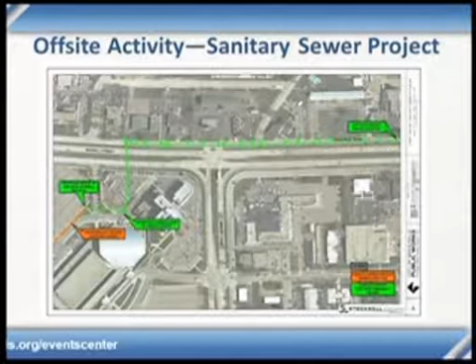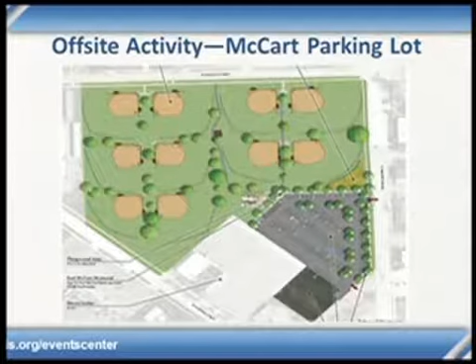Next project is the additional parking being added at the Earl McCart fields. We've had good discussions with the Park and Rec team, specifically Don Kearney, and met with the McCart sisters on site to review the proposed plan and got good feedback from them. Next week the Park Board will see the proposed project. Our anticipated letting schedule is in June, with completion by mid-October, adding just short of 300 additional spaces to the McCart fields.

One of the things we wanted when working with the McCart sisters was to make sure we recognize the McCart family. So one of the features being added right near the existing playground in this park is a sign that will highlight their family's name at a focal point in the park. It's been a good working process.

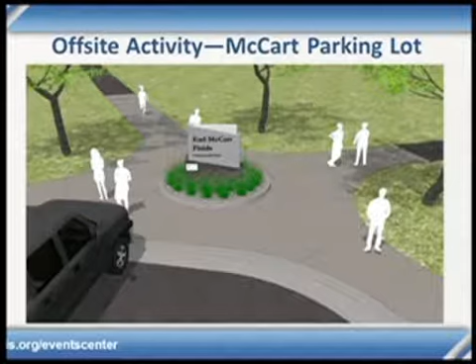Now I'd like to introduce the Mortenson team, led by Dan Mills, Greg Huber, and Jason Miranowski, who will take you through the schedule as well as the 4D visualization of the event center. There's been questions this week about what 4D is — essentially, you take a 3D image view of what a building will look like when it's being constructed, and add the schedule to get that 4D element. This is a key aspect of hiring a team like Mortenson that handles this scale of project, allowing them to lay out construction in the most efficient, cost-effective manner, while coordinating subcontractors safely and effectively. With that, I'd like to bring forward Dan Mills.

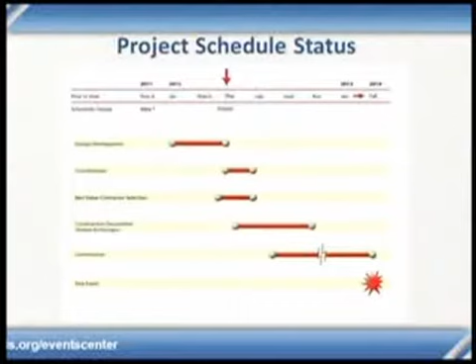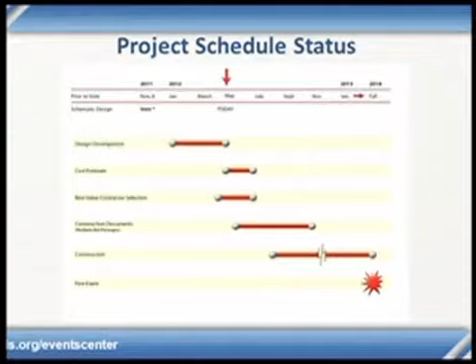We will also, in parallel with getting ready for the start of construction, be starting to issue our bid packages. There'll be 4 additional bid packages outside of the one that's on the streets right now. Bid package 2, the site and foundations, will go out in June. Bid package 3, the structural steel, elevators, some concrete work, and the ice rink, will go out in August. Bid package 4, the enclosure around the building and the roofing, plus the interior framing of the walls, will go out in November.

And then the final package, which wraps up all of the interiors of the building, will go out by the end of the year. So there'll be a phased process for finishing the design and procuring the rest of the work.

As I mentioned, construction will start in July with a planned completion by the fall of 2014. So we can schedule our first event for fall of 2014, and schedule our first event then for late 2014.

So with that schedule overview, I want to introduce, well, you know him already, Greg Huber with Mortenson. Greg has been leading our planning efforts during the design phase. So Greg and I are going to walk through the phasing of the project.

In order to best describe the phasing and the intent of how we build the project, we've developed a 4D model. It's a 3-dimensional image tied to the schedule being the 4th dimension, i.e. the 4D model. We find this tool very beneficial for fleshing out challenges of exactly how we phase the structural work versus the enclosure work versus the interior work. Sometimes we resequence based on this model, and then it becomes a great communication tool to the subcontracting community when they're trying to price the job. So it takes a large, scary project and breaks it down into manageable pieces so that we can get more competitive prices.

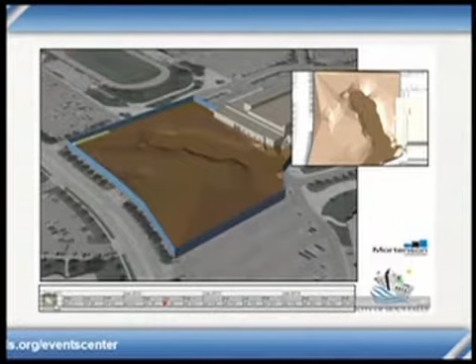So as you look at it now, before we get started with construction, we first have to secure the site. The blue walls, as it appears around the perimeter, will actually be temporary site fence to keep the public safe. It'll also be an opportunity for signage for the city and advertising events and whatever else we might want to do for public information.

The brown area in the middle is actually a subterranean image of the ground below grade and the rock elevations below grade. So with that, I'm going to turn it over to Greg. He can talk a little bit about the subterranean.

Madam Chair, Council, thanks for the opportunity again. We're really excited to be showing this to you guys. This is the result of a lot of work from the design team, and we took that model and, like Mark said, applied time to it so we could visualize construction. The side benefit is that everybody else gets to see our vision right along with us.

What you can see there is the subterranean profile of the rock. Right now what you see on the surface is a parking lot. What actually is under there is a combination of rock that's close to the surface and kind of a valley that runs diagonally through the site. That was determined through the geotechnical exploration conducted by AET about 3 or 4 months ago, where they probed down to see how far the rock was.

That drove all of our foundation systems, and as we go along and show the foundation construction, you'll see the differences. On the bottom line, like Dan said, there's a time ticker, and that's a direct link to our construction schedule. So as we move along here in mid-July, you'll start to see a little bit of color shading and variance.

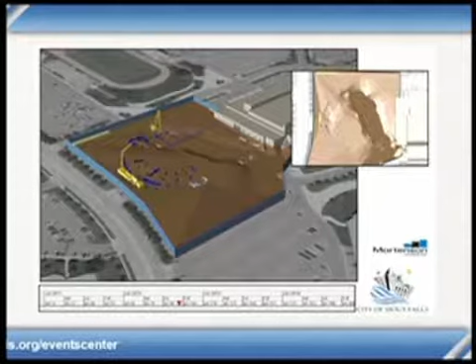The reason we're starting when we're starting is so that we can get the concrete work, the foundation work, done in the summer and fall, and get that completed, so you don't have to heat the concrete or heat the soil when placing it.

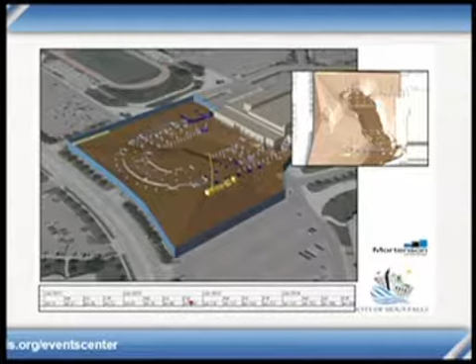Some of the work you've seen, as well as all the right-of-way, was the site stripping - taking off all the asphalt, bringing in clean fill to place all the foundations around. At this point, this is going to be late fall, so there'll be some snow flurries possibly flying around at the same time. We didn't model that, neither did the design team.

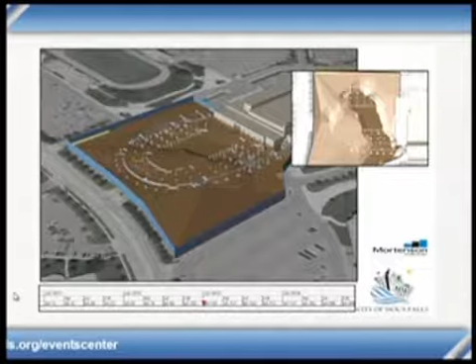So you don't see a lot going on. What's going on, if you could hit pause right now, is the structural steel is being made off-site. So even though there's not going to be a lot of visible construction in the late fall, early winter, there's a lot of construction occurring off-site.

There's structural steel fabrication, precast fabrication, and I'll turn it over to Dan to show what happens after that. So as Greg mentioned, our first motivation is to get the foundation work done before we get too deep into winter.

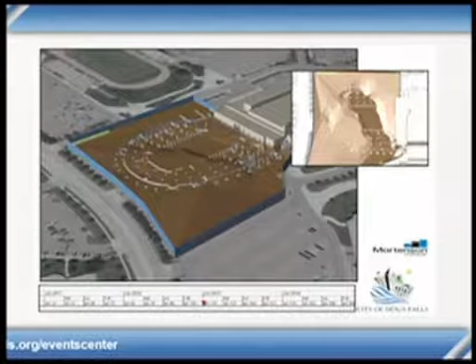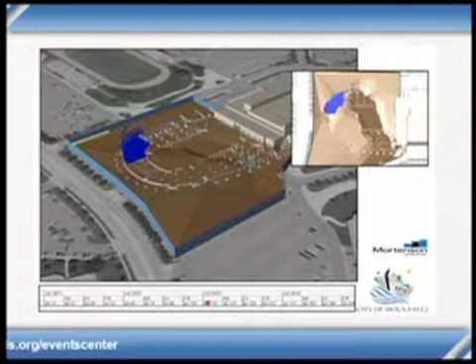And so now it's January, most of the deep foundation work is done, and the steel starts to show up on site. We'll start in the southwest corner, and the phasing process we do is we'll build sections of steel full height, in chunks as we move around the building. So instead of doing it by floor and in layers, we build it up in sections as we move around, then stabilize that section of structure with the metal deck and the concrete slabs.

All of this phasing is reviewed by the structural engineer to make sure that we're not erecting it in such a way that would cause the steel to collapse in any way.

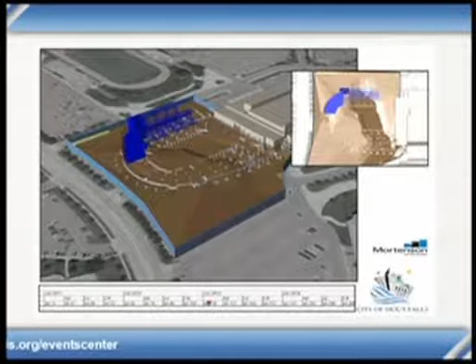So the reason we're starting on the side we're starting on is that's where all of the heavy infrastructure for the building is. All the mechanical and electrical rooms are in that area. We want to build that area first to allow the maximum amount of time for the mechanical and electrical trades to build out those rooms and get the freight elevator running. So the heart, soul, and lungs of the building are all over on that upper side.

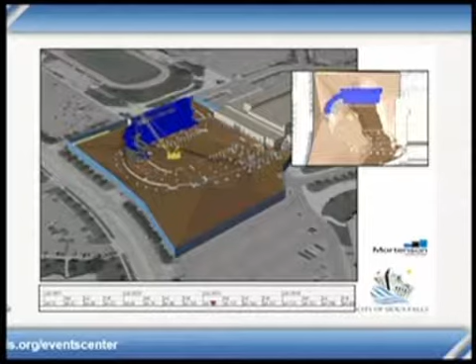As we keep going with the structure, we'll have a crane that'll sit in the bowl area, and it'll continue to move around and set sections of the building in the different quadrants. We label all these different quadrants and clearly identify them in the phasing schedule.

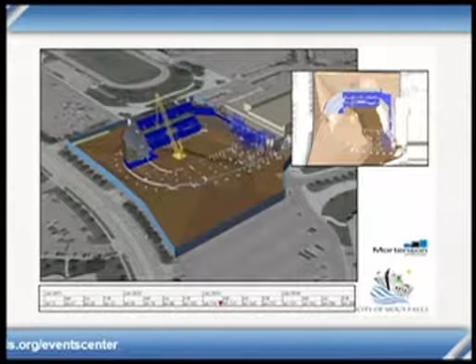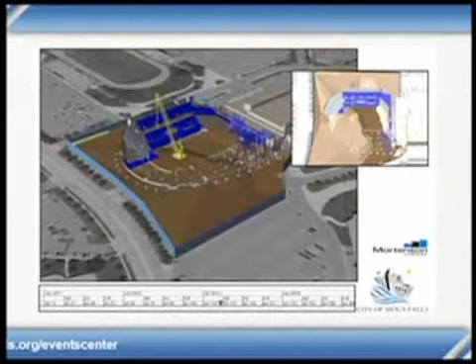Now we're starting to follow along behind with the precast stadia, the concrete seating sections that span between the raker beams that support the seats. That installation's fabrication is done off-site, but then the installation moves along pretty quickly once they show up. So we need to make sure the steel is far enough out in front of the precaster so the precaster doesn't catch up to them.

We're also doing connections and links to the existing convention center as we move around the building. The gray areas identify work that's complete, and the blue areas identify work that's underway.

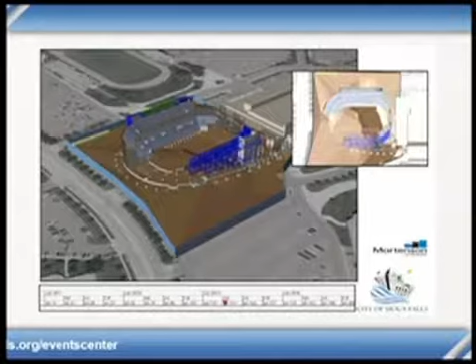So if we pause here, one feature that is both structural and architectural is these 4 large cores in each corner of the building. They're structurally necessary to support lateral loads and hold up the building.

They'll have a stair tower within those cores, but on the side facing us right now, it'll also become kind of an inverted horseshoe, part of the architectural feature of the building. It'll be semi-transparent, even with the glass and facade in front of it, you'll still be able to see that structural upside-down horseshoe through the facade.

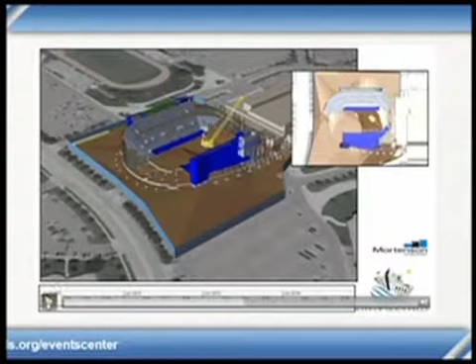Okay, we keep going. The steel is continuing to go up. We're into April, May, June of next summer. Structure's continuing. You'll notice now we've left the end of the building out. It dawned on us we had to get the crane out of there. So we left the end of the building out for the purpose of being able to allow the crane to come in and out and set the roof trusses.

This is why we do modeling, to figure this stuff out ahead of time. Otherwise it's kind of ugly having to tear the crane apart and drag it out through the building. So, now we'll start over, it'll pick up.

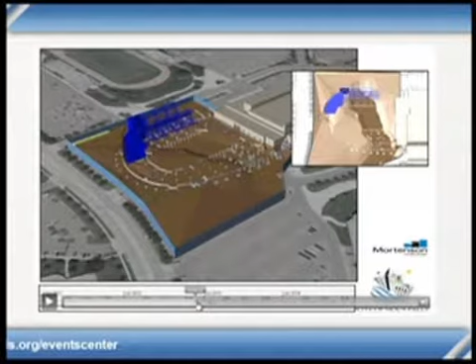So it's Christmas break now, everybody's gone for a week. Okay, now we're coming back, catching up. Crane's moving around. It's kind of interesting to watch this when we don't pause it, and we'll do that at the end here, we'll just let the whole thing play through. It's about 3 minutes long.

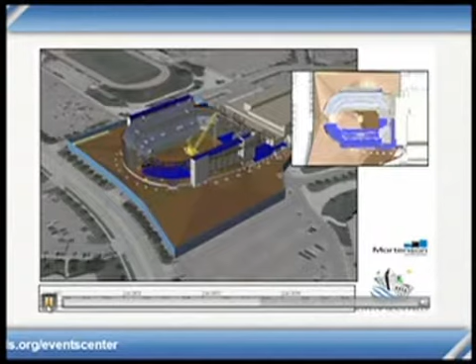So the structure's pretty much up. We'll leave the end of the building out. Once those 4 core towers are up and the structure is set and stabilized, we can start setting the roof trusses. So pretty quickly here we'll be setting the roof trusses.

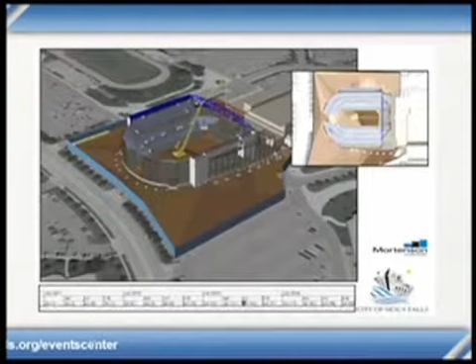Why don't you go ahead and talk about roof trusses and enclosure? Yeah, so a key component of arena construction is the management of all of this big stuff, all these big trusses, all of the big cranes, and this is another portion of what it helps us do. Once the majority of the precast gets set, you'll see a lot of the big steel going up, and it'll go very quickly because most of it's prefabricated in long roof sections.

For example, the section up there, the big blue truss as you see it, is 272 feet long and weighs about 190,000 pounds or so. It's a large piece of steel that gets set, so all of this will go quickly. What we do is we pick and carry those large sections, whether they're bridging sections or some of these large trusses.

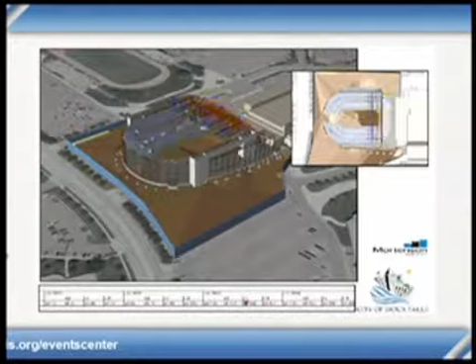As we go along, we'll turn the show back to structural steel as they get all of these large roof sections in place, and then we'll be backing out of the bowl. At this point, we're decking and filling in the western part of the building. The crane is actually outside of the building, and we'll construct that 42-foot wide piece of structure last, build that up, set the precast, and then put the lid on.

All the while, what you haven't really been able to see is on the north side, there's been a lot of enclosure activity. There'll be a lot of precast, metal panels, windows, all happening in the sequence of the structure. That's how we'll finish the building. We'll start in the northwest corner, go clockwise, and that's how you'll see it get finished.

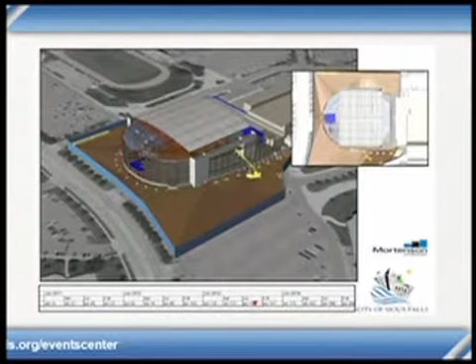So as we continue, the roof will get finished to the west, and then we'll start working on the south side, again in the sequence of the order of construction of the structure. And we're targeting about middle, end of October for it to be fully enclosed.

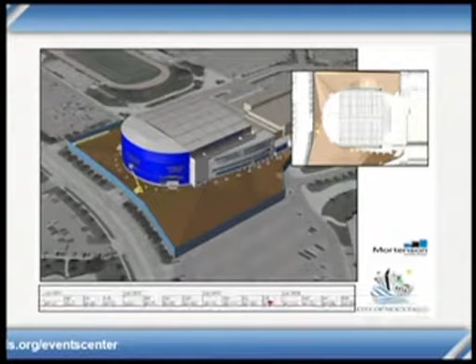At that point, you'll be wondering what are you guys doing, because it'll be closed up and there won't be a lot of apparent progress after that, except for a lot of site work and landscaping. But once it gets fully enclosed, there'll be a lot of interior work with all of the locker rooms, concourses, suites, etc. getting finished.

I think that's about the end of the animation. So we'll pull it back and start it again and just let it roll through the whole thing here quick.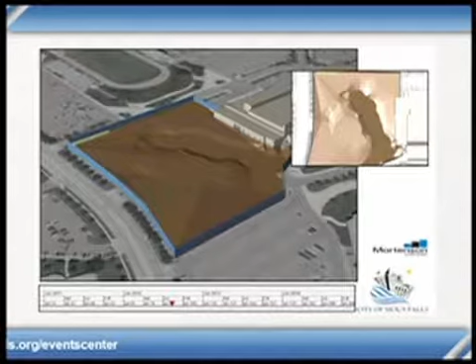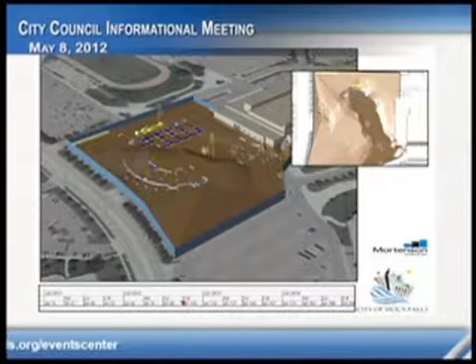As we're going through here and you see some things pop up, you can certainly ask what's that. Sure, so right now this is about October of 2012, this fall, where all of the foundations will be placed.

Earlier, back in the middle of July, like Dan said, we'd be starting construction, and you'd see a lot of earth-moving equipment stripping off the asphalt, putting in a couple feet of sand. Then here it's about December, end of December, and first part of January is when the steel arrives. So really just the first part of 2013 is when the structural steel will arrive.

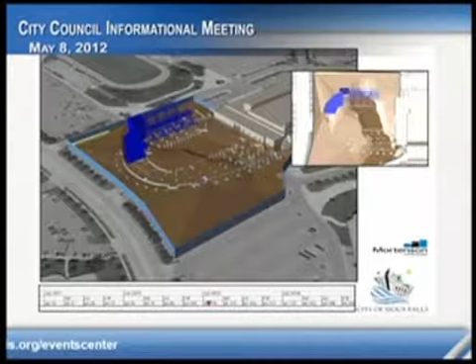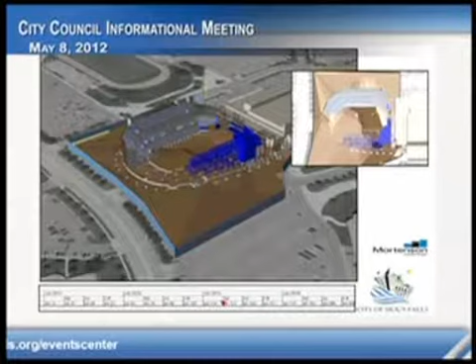The northwest quadrant will begin. So in about March or so is when we'll start precast. At this phase, simultaneously we're erecting structural steel, roughing in mechanical and electrical equipment, and continuing around the chase around the bowl from the northwest corner clockwise.

Then continuing around structural steel on the south side, so that's end of April or so. Southwest corner precast gets installed, structural steel, actually southwest corner structural steel and the precast on the south side.

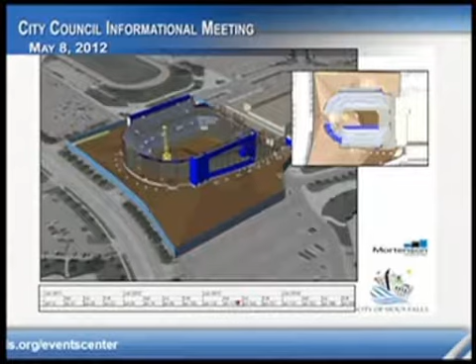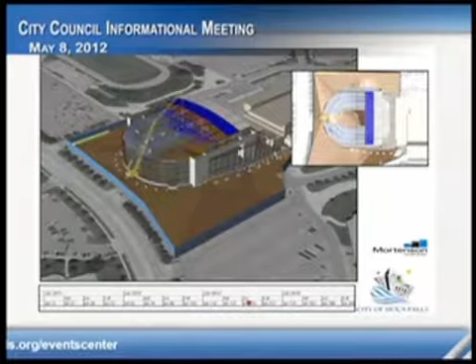Right at the end of June, beginning of July, is when we'll be setting the big structural steel. A lot of that structural steel you actually see getting assembled on site. There are large sections that can go over the road, and then all of that gets assembled on site as well. So you'll see a lot of that structural steel, especially on the west end of the job.

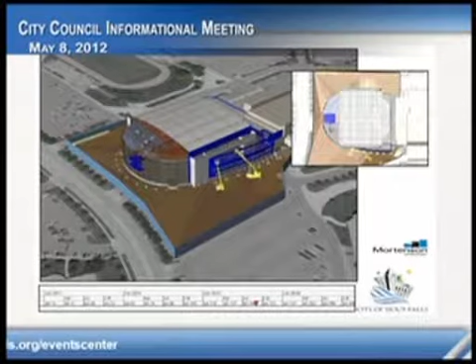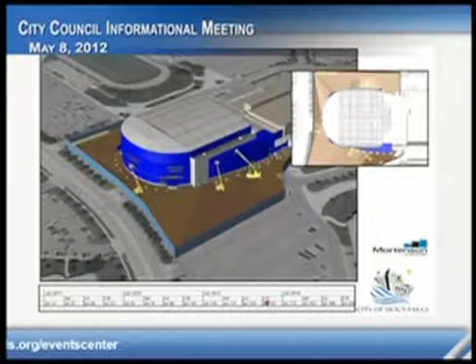Right now we're in about mid-September when we start closing up that roof, erect the leave-out section, assemble that, put precast in, and then in early October finish the enclosure and put the lid on. By the end of October, early November, we're completely enclosed, doing finishes and completing the building.

Then in 2014 is when we plan to do a lot of the site work. There might be some phasing to be arranged with the convention center and those operations, but that's when you'll see a lot of the improvements, in the summer of 2014. And then set up for a completion in the fall.

All right, thank you. Any questions, or do you have something else then? No, just if you have any questions, we do have the project team here that we can do our best to address.

Councilor Karsky: Very impressive demonstration of the four-dimensional. I kind of was wondering what the fourth dimension was. Now I know.

Curious on the staging. Where is the staging of materials, equipment, and that type of thing going to occur? It's going to be a big project with a lot of stuff, a large project and a big building for a small site. It's an extremely tight site. Some staging will happen on site, but not very much. We'll have to set up just-in-time delivery for most of our materials, and we have to make it clear to our contractors that they will have to find off-site storage and bring only the materials to the site that they need that given week, because there just isn't room on site for a lot of storage.

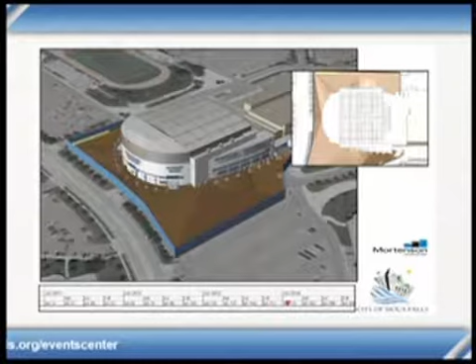Well, those designs are already underway, so that's our first step. Likely next month, Mike Cooper will bring you the template, because once mid-July comes and the fence goes up to cordon off the construction, we're going to displace current spaces, and we need to leverage other assets in close proximity with a busing service to make sure we can still meet the parking needs. I'd probably leave that for next month; they've been working diligently on how to offset the loss in those spaces during construction, and then ultimately during the reconfiguration of those on-site lots. So if that's adequate to wait till next month, I think that would be good.

Yeah, I think that's an important conversation to start having, because each of us is thinking of big events we either go to or participate in, and we're already thinking of the logistics of that process in our daily lives out there -- it's going to be interesting.

My other question, if I might, Madam Chair, is Western Avenue. We know it's going to get beaten up pretty bad with traffic. Do we have a plan for that following this construction period? Will it get a facelift, or how do you think we'll handle that?

Well, that section of Western Avenue is in very good shape. The contractors have to meet legal load limits, so we'll certainly keep an eye on it and impress upon them that everything still has to be load legal. Western Avenue essentially had significant work from Madison south recently, and now this year we'll go from 12th Street all the way south to 41st Street with improvements. So Western Avenue today is actually in very good shape, and we'll make sure it maintains that way.

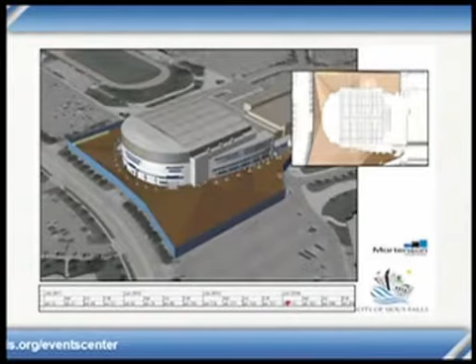Good, thank you. Any other questions? If not, do you have anything else? Just that this video today is also uploaded to the project website, so if you'd like to go back to it and see it, certainly do so, as well as this presentation. Again, thank you for giving us the time for the update.